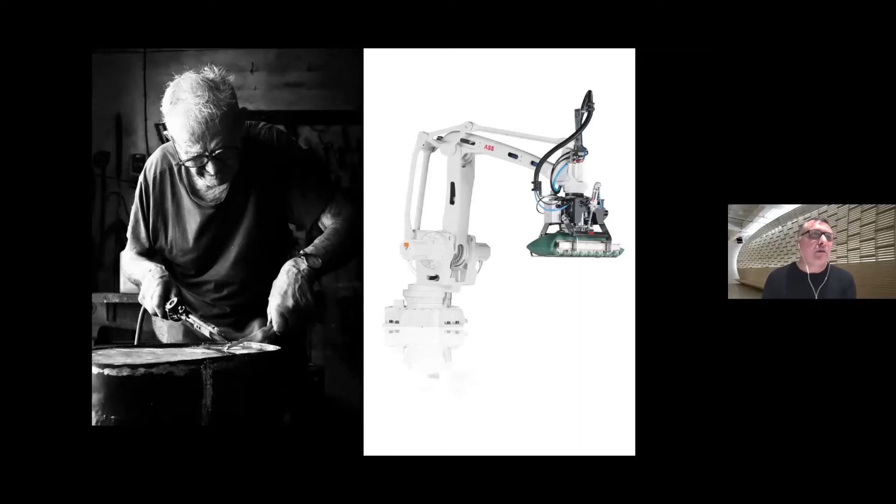So while practical, craftsmanship is not simply a means to an end. Craftsmanship is not limited to work with hand tools. One can embody craftsmanship in a variety of fields and through a variety of technologies. And by common measure, it takes about 10,000 hours of practice, patience, and experience to become a master craftsman. No matter what the field or tool, woodcarver, musician, experimental scientist, or computer programmer, there's an amount of time that one must put in before one can start to tackle broader questions and new problems without the limitations of skill getting in the way.

Sennett talks at length about open source computer programming, and in particular the Linux computer language, as a subfield in which programmers work for the desire to make an elegant code in and of itself. In this context, quality is dependent on an effective community of software engineers and coders working together with the shared goal of bettering the software. The combination of craft and community is very critical, and it's something I'm going to return to at the end of the talk.

So in all eras, craftsmanship implies a particular relationship between the craftsperson and the tool, selecting the right tool for the job. This is more often an ad hoc, pragmatic exercise than an attempt at procedural purity, as craftsmanship focuses on the thing in itself, according to Sennett, not on the tool or the procedure. The thing made is its own justification. Richard Sennett defines craftsmanship as the basic human impulse to do a job well for its own sake. And thus we usually associate good craft with custom products and a high degree of refinement. But what may be understood as good quality varies with the context of the project.

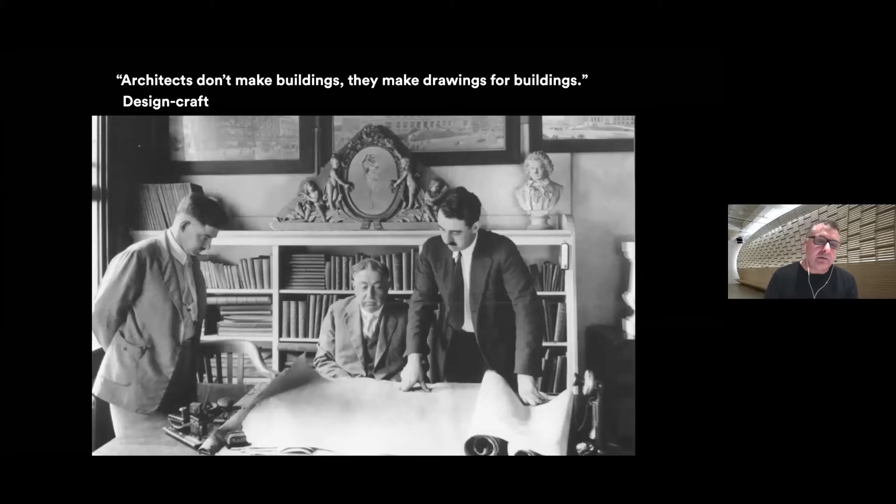Like technocraft in the field of manufacturing quality control, there is an attempt to merge the customization of traditional craft with the efficiency of mass production. However, a lack of coherence between design craft and building craft can still lead to unsatisfactory results. Here in an image from Artforum magazine, a critique of Zaha Hadid's Opera House in Guangzhou in China, which is designed computationally, a very sort of supple, formal building, but on close inspection of the details, you find that they're extremely crude and poorly resolved, where intersections are missing by feet at a time.

And Richard Sennett refers to this as a conflict existing between getting something right and getting something done. And sometimes the desire to force perfection often misses the point of the actual resolution that will happen in the field. So here we see advanced digital design techniques, but a lack of understanding of the real world context of building in China at this particular time, the speed of construction, the methods, the skills of the builders, and the commitment of clients to follow through on very tricky, custom fabricated equipment and details.

So often sophistication at one end of the process, at the design process in the office, must accommodate a lack of sophistication at the other end of the process on the site. And this may require a hybrid technique. Now, Rem Koolhaas recognized the limitations of this idea in OMA's early work and knowingly took advantage of these, or at least post-rationalized it this way, to argue that because there was no money, there were no details, and it's just architectural concept. So he did not care that things were not resolved right. That was potentially a self-serving argument, but nevertheless, it's an attempt to try to deal with that disconnect.

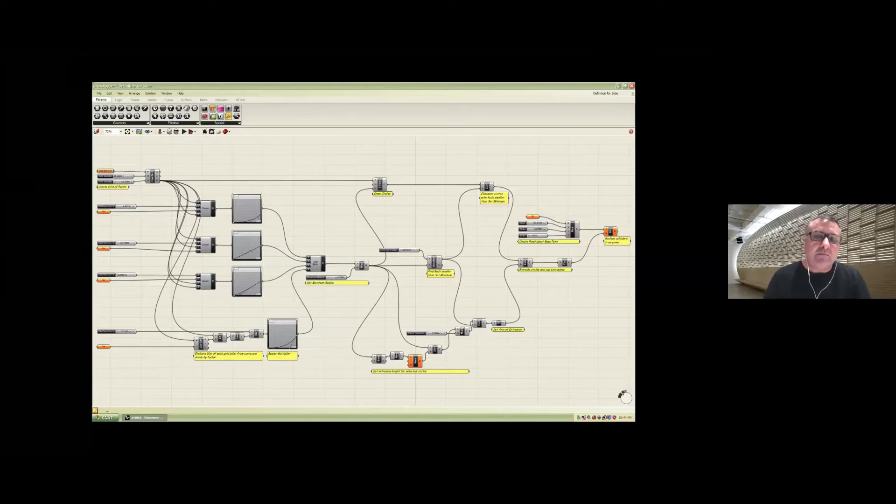And the original version of the model had this infinite variety of holes from a defined maximum and a defined minimum. But we later found out that when we're not working on a machine in the basement of our college, we're working with a fabricator who charges $120 an hour, machine time starts to become a real factor. So routing all of those holes would take a significant amount of time.

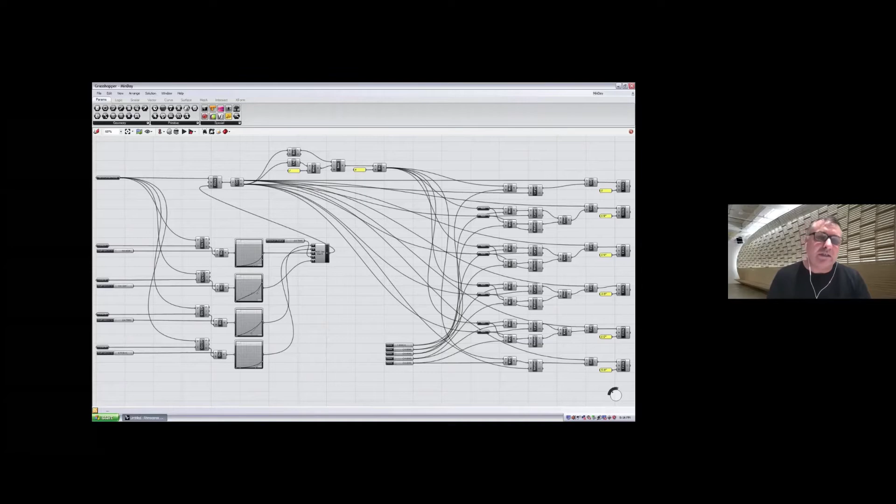And instead, we decided to optimize the project for 5 discrete hole sizes. So there's only 5 different diameters as opposed to an infinite variety. And that allowed them to work with pre-existing drill bits as opposed to routing ends, to drill the holes in one shot each, which cut about 80% of the machine time, and obviously quite a lot of money.

So as a design process, you can start to see the colors indicating the different hole patterns. It's just a variation on the same original script. But in the end, I think the casual visitor would probably understand this as fairly close to what we originally intended. But in order to get to this, one really has to understand the pragmatics of making as opposed to the ideals of a potentially complex project.

For the same project, we designed a furniture piece called the Soft Stones, which was the origin of a furniture line that Min Day started and still kind of exists, called Mod. For this project, we created a coffee table that split from a singular rectangular block into 6 separate and completely unique shapes.

So as you can see, the shapes all have discrete clarity to their form, but each one is very unique and fits only to its adjacent neighbor. And here we have a combination of machine cut surface, cut on a CNC router, and hand finished ends. So although we manufacture this piece and it's been sold several times, the top is always the same, the bottom always varies in a subtle way.

At the Bucktown House in Chicago, we've also designed numerous furniture pieces, but here we took the notion of custom-made furniture and expanded that to become architectural elements in a project that really is based entirely around an elaborate millwork system. In this case, a bar emerges at the push of a button. We used a television lift and just inverted it, and it lowers the bar. I suppose you could lock that so the kids can't get in there, but it impresses the neighbors.

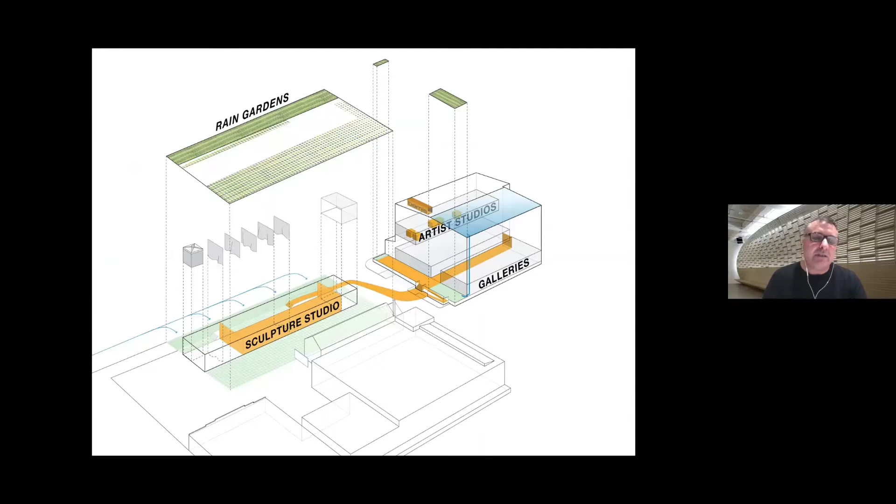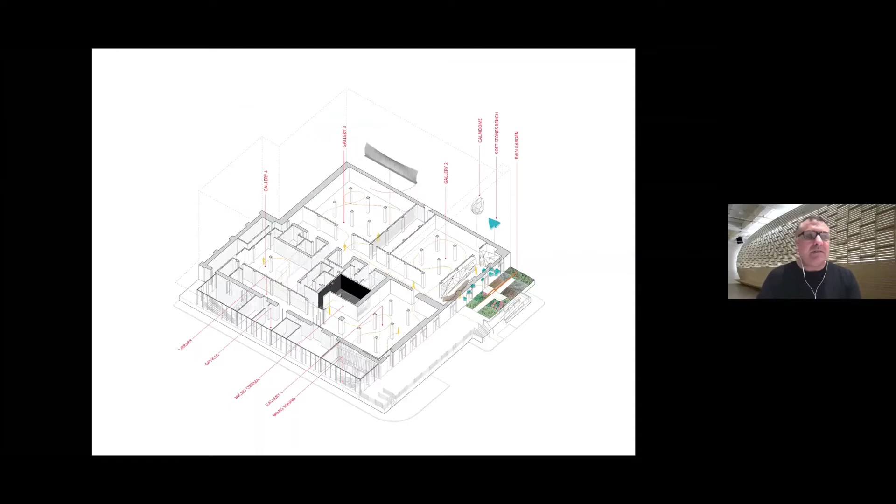So FACT actually began with a master plan for the Bemis Center that's evolved over time and over the years. And later we've added numerous projects and expanded the master plan and actually implemented several of these through different design build studios. So the garden on the exterior, the rainwater catchment idea that didn't get materialized, but the garden is there. On the 3rd floor, we added a whole level of studios plus workspace and installation space for the artists. On the main floor, we reconceived the gallery spaces, reorganized those, and created a cinema and a new reception area that I'll get to in a moment.

And then currently we're working on a venue and facilities for a new sound art and experimental music program that the Bemis runs to bring artists working in sound and music, giving them a place to work. So we have a recording studio and sort of support areas, and then a performance venue where they can perform their works.

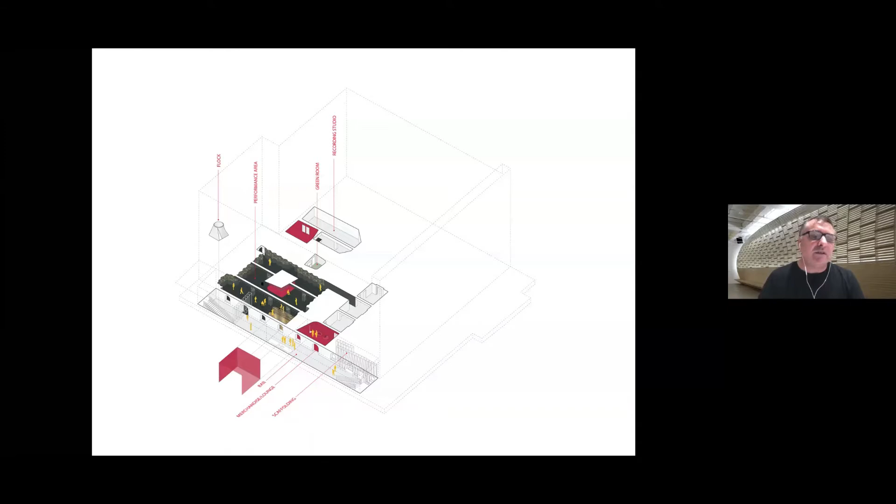But the first project that was actually built is called the Bemis Soft Cube. This was in the summer of 2008. We were asked to create a sort of transformation of a gallery space in this old warehouse building to allow lectures and other kinds of live events to be performed in what is generally thought of as the White Cube Art Gallery. Since the day we were asked to do this, we had 6 weeks to complete the whole project and about a $1,500 budget. Obviously, that's not a lot of money when you start talking about construction and custom fabrication.

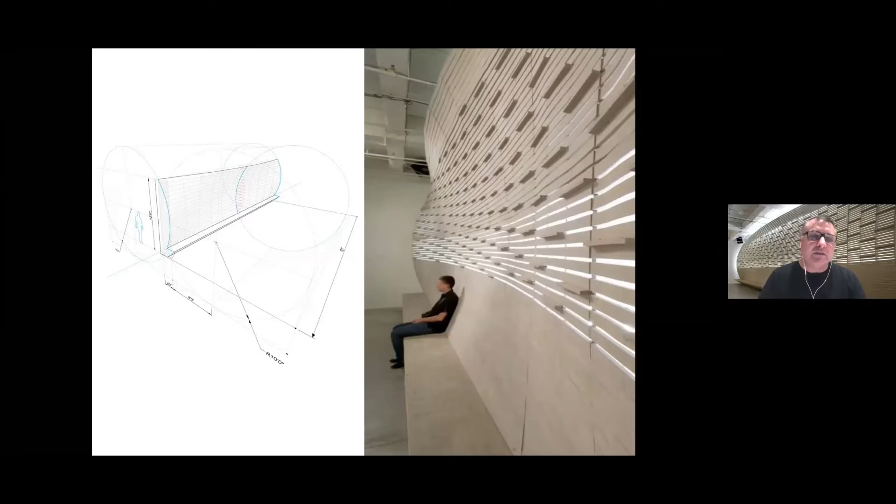But we designed as an acoustical baffle this 40-foot wall, 12 feet tall, as a simple sort of intersection of curved geometries and then a sort of complex hyper surface that wraps over that to create a diffuser for sound, but then resolves itself as a bench at the base for visitors and others to enjoy the show on the other side of the room. The entire piece is built out of cheap CDX plywood, CNC cut and notched to join, and then wrapped with Homasote strips. Construction here, as you can see, bolting these sections together on top of this base, and then in the end, the final piece.

This was intended to be installed and used for the duration of this exhibition for 3 months and then taken away and stored. But they've kept it up since that time, and so it's been in place and used for about 12 years and still going strong. The only issue is that when they told us they wanted to keep the piece installed, we had to tell them that we incorporated no way to change the light bulbs in the back because we assumed that these fluorescent tubes would survive the 3-month run of the show. So we had to modify the piece somewhat so that there was access in the back, but other than that, it's maintained its position in the gallery.

And as you can see in use, it's used for a variety of different kinds of performance events and lectures as well. And it's part of a goal that we've had working with the Bemis to transform the gallery into a place of social engagement, not simply a place of display and consumption of visual materials. But we really think of the Arts Center as a social condenser that brings the community and the artists together.

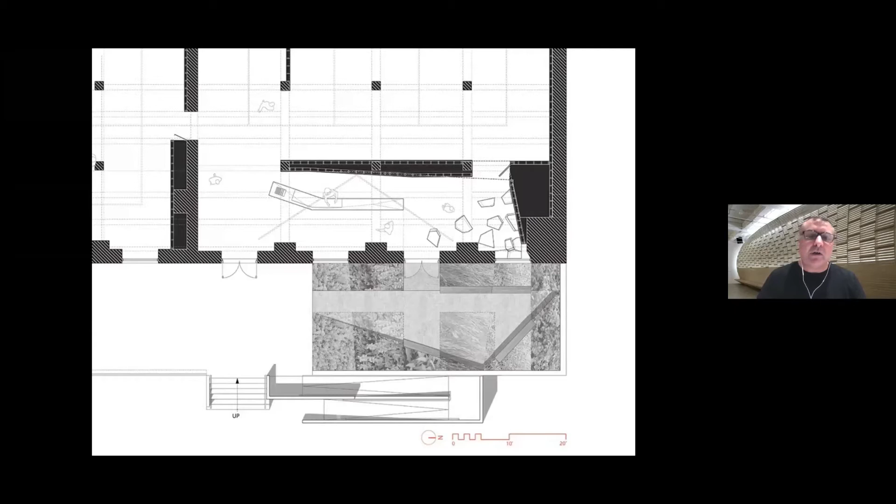But by taking the first bay of the gallery away and creating a space that doesn't have art displayed, we created a social environment, practically used as a reception desk, but that could be converted in the evening for a bar to serve drinks and so on during an opening event.

So this is a project that actually began in the office. We did schematic design in the office and then brought the schematic design to the students so that the students, in fact, would jump immediately into design development and focus on details and not be concerned with initial conceptualization.

The argument I have in the FACT studio and coursework that supports FACT is that most architectural education exists in a world where we are conceiving projects and taking them through maybe schematic design or some level of resolution of that nature. And the idea with FACT is to go and explore the creative opportunities from design development through construction, where, as any architect knows, there's still a lot of things to be thought about.

So the project, as you can see, is an abstraction of a white gallery space, but distorted and then occupied with furniture, which is a soft stone. It's called the soft stones. It's a version of the Stones table, turned into a sort of puzzle-like seating, and then this 24-foot long reception desk. The geometries that we used are based on a pinwheel aperiodic tiling pattern.

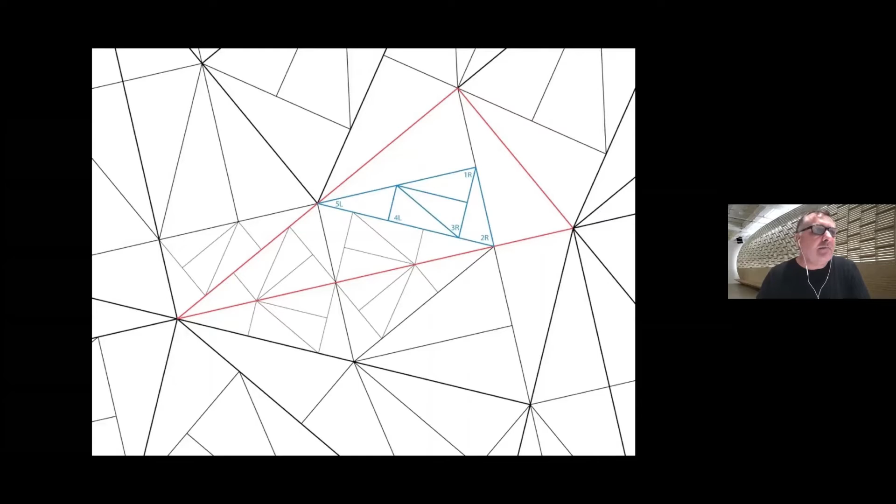This is a fractal pattern that through very simple rules, using scalar versions of the same shape, produces exceptional complexity. As you can see, each triangle can be subdivided into 5 more, and scaling up and down through that allows us to create a very complex set of patterns.

So we took this pattern abstractly, it's scaleless, and then selected an area of that to scale to the Bemis Center space. So you can see the dotted lines there representing the 2 wall surfaces. The red lines then became points of inflection from a very large triangle that doesn't even fit the space. And the smaller pieces are scaled to 8 feet, half of a sheet of MDF, so that we had a very efficient use of material.

And then from there, imposed patterns upon the surface. Now, obviously, this pattern could be implemented at any level of scale. So we had to make decisions about where it shows its density and where it starts to soften and loosen. And so using an algorithm based on these primary inflection points where the major triangles or vertices are coming together, we were able to control the diffusion of the pattern and its scalar nature across the surface.

So this is a photograph of the finished piece, and you can see the large joints are actually joints between panels. The second scale joints are inscribed in the surface, and then the pocketing brings 2 levels of panel triangle inside the others. So the other issue here is trying to turn this 2-dimensional pattern into 3 dimensions, where some distortion is necessary. And as you can see here, the pattern's both bent as we create the corner in the room and inflected along those red lines.

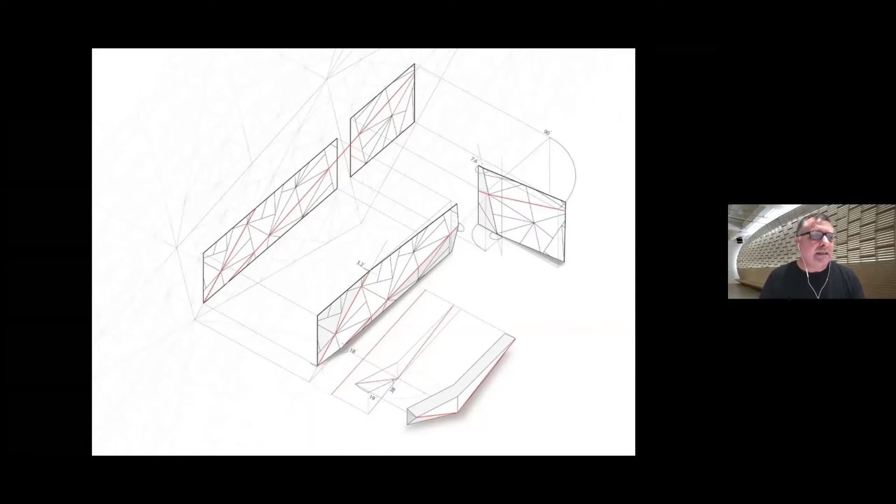And then the desk is actually an extrapolation of that pattern into a fully 3-dimensional sculptural object that sits in the space. As you can see here, the vertex of the wall, you can see how that traces across the surface of the desk.

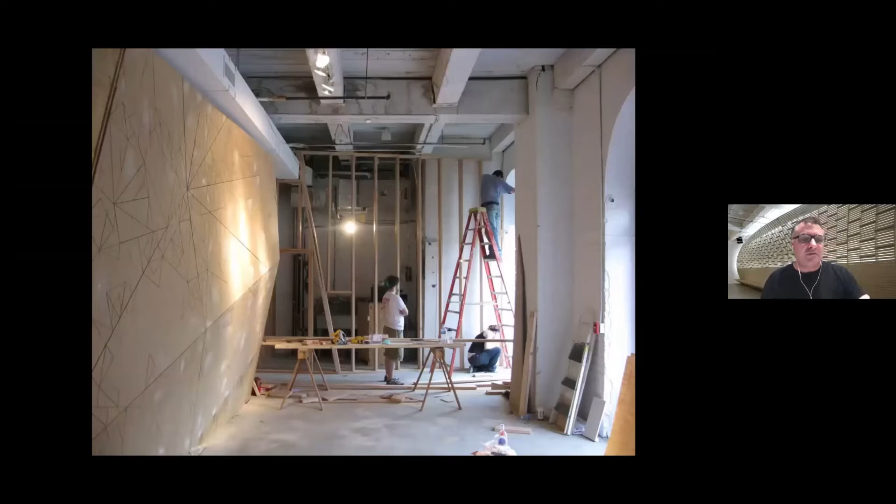The inherent perfection of this piece obviously could be taken to extreme lengths. I think the students did an incredible job of fabricating this and installing it, allowing its abstraction to read through. But they had to do this in a building where between each bay of the 16-foot column grid, the floor might vary 2 inches. So we're dealing here with a very complex sort of intersection of fabrication at a tolerance of 1/1000th of an inch and a building that has extremely low tolerance. And so bringing those together created some interesting challenges.

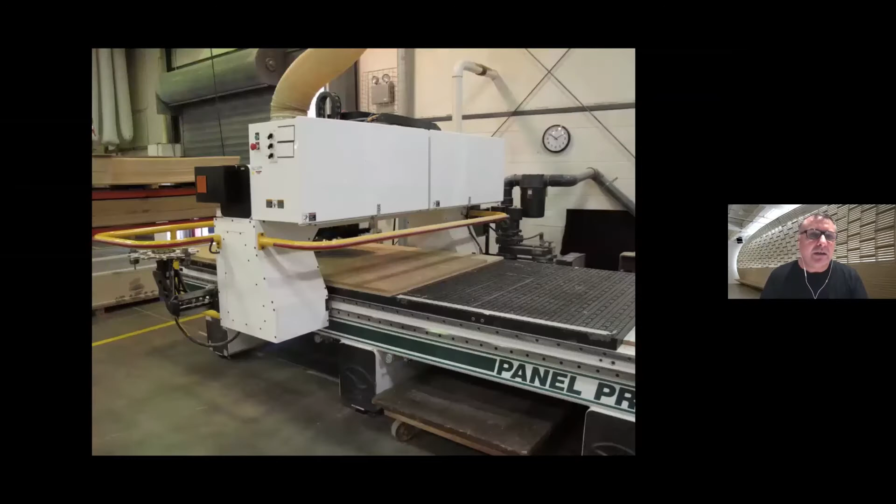Another challenge for this group was, of course, that we had to mill 35 sheets of MDF. And one of my priorities with design build is to really optimize the educational experience and not just turn it into an opportunity for exploiting free labor. And I couldn't imagine students standing by a CNC router for the whole semester while each of these sheets gets cut and pocketed. So we did mock-ups and tests on our own, and then started to search for a partner who could build it. And we found this machine in Lincoln.

So here, this collision of high tolerance digital fabrication with a very rough historic building, and what some people call the site joint, the point where the building meets the site is never as controlled as the building itself, becomes an opportunity for thinking about how these kind of tolerances start to collide and create opportunities. So the way the wall meets the window, it's not perfect, but it starts to show the intersection of these different levels of understanding of tolerance. Fortunately, nowadays, they've gotten rid of the video monitors and they're no longer mounted on the face of the wall, which is not something we were too excited about.

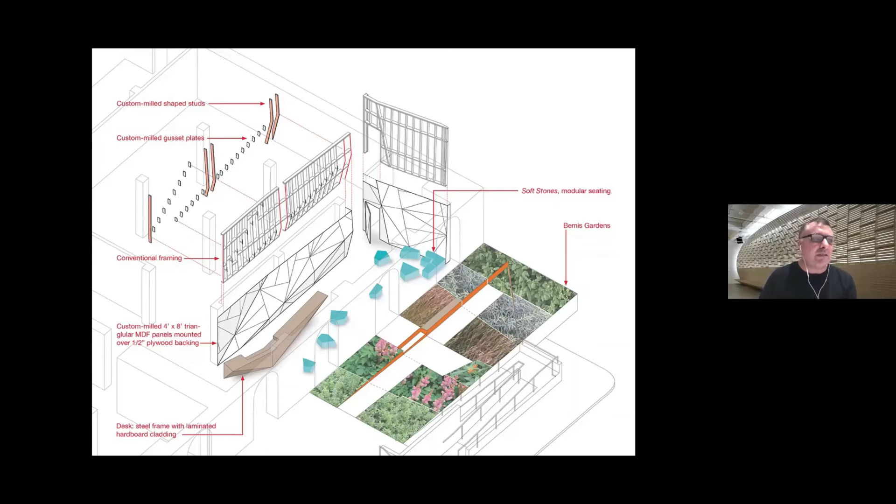The garden, I'm not going to show today, but the garden is sort of a further extrapolation of some of those geometries out onto what used to be a loading dock and was planted with native plants of various kinds, working with the landscape architecture department and students from that program. The current project, though, the experimental music and sound art program, the first phase of this was completed at the beginning of this year. It's called Bemis Low End, and it's a performance space. We had maybe 3 performances in there before COVID, and everything is shut down. The Bemis still runs virtual performances, sometimes in the space, sometimes wherever the artists happen to be located. And obviously, we're waiting for the pandemic to resolve before we can open the space again.

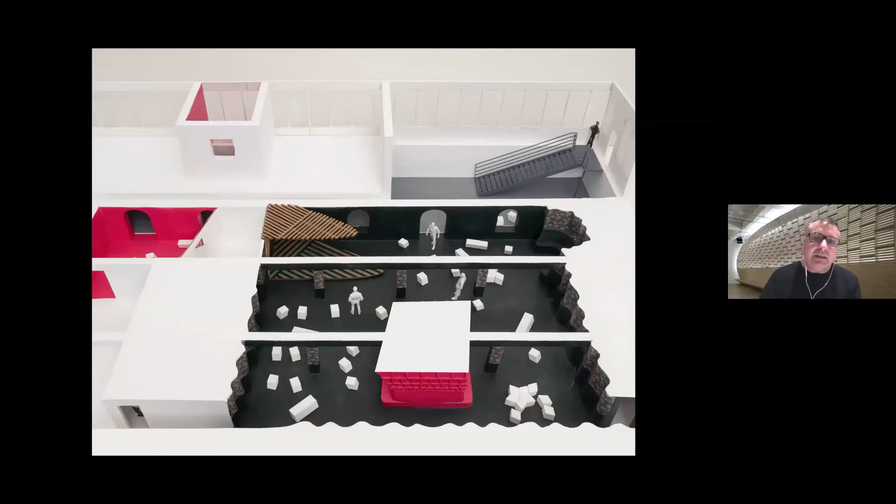One of the things that I think is of interest in this project is a reference to what the craft theorist David Pye refers to as the workmanship of risk versus the workmanship of certainty. So the workmanship of certainty is familiar to architects. It's usually what we deal with in the architectural world. We draw something on a computer, model it, it gets built exactly as drawn, and there's very little change between conception and completion. The workmanship of risk, on the other hand, introduces uncertainty into the process. This would be like a wood carver or some traditional fabrication technique where the difference between one iteration and the next might be fairly noticeable, whereas in the workmanship of certainty, exemplified by mass production, one rarely sees difference between one shoe and the next shoe.

So in this project, we wanted to think about both of those ways of conceiving of craft and addressing that in the same project. So fabrication often begins with large-scale models. These half-inch scale models are actually ways of designing at a scale where one can get into a high level of detail and start to build things the way they're really to be built. And then we start doing one-to-one mock-ups and move on to fabrication. In this case, we split the project into numerous phases in order to accommodate the complexity and scale of the project, and also to work with budget years, so that some work was done in 2019 and other work was done in 2020.

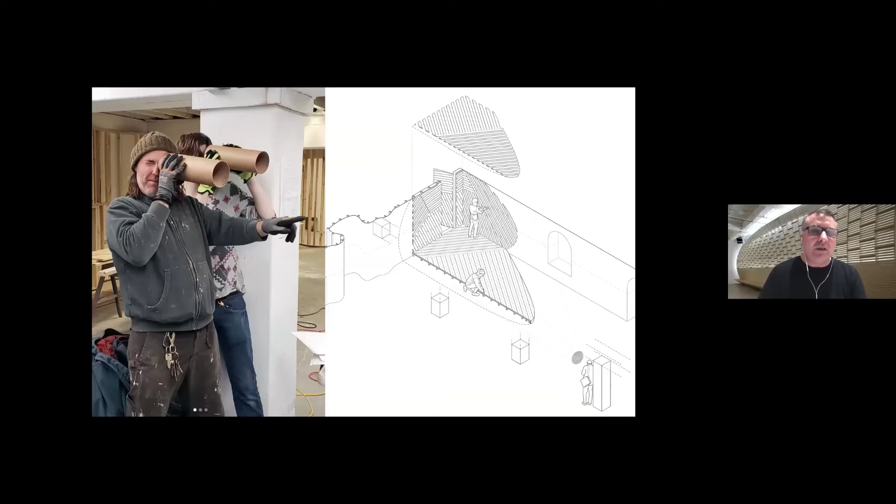So here we have, again, in David Pye's terms, the workmanship of certainty played out in a high degree of control. But then this other element in the space we call the monolith exemplifies the idea of workmanship of risk, but in fact began its life as a parametric model as well. So this object called the monolith is really a wrapping of a mechanical room right in the very middle of the performance space that couldn't be moved for budget reasons. It's actually serving the upper floors of the building.

So we had to keep this, we had to deal with it, we had to address acoustic issues from the mechanical equipment itself, but also the acoustic effect that this object would have within the space. So baffling it on the exterior, creating layers of acoustic insulation was really critical, and then allowing it to absorb sound. So the bottom is an upholstered seating element, which is very popular for patrons, and then the top began as a way to break up various frequencies. The larger holes deal with bigger frequencies.

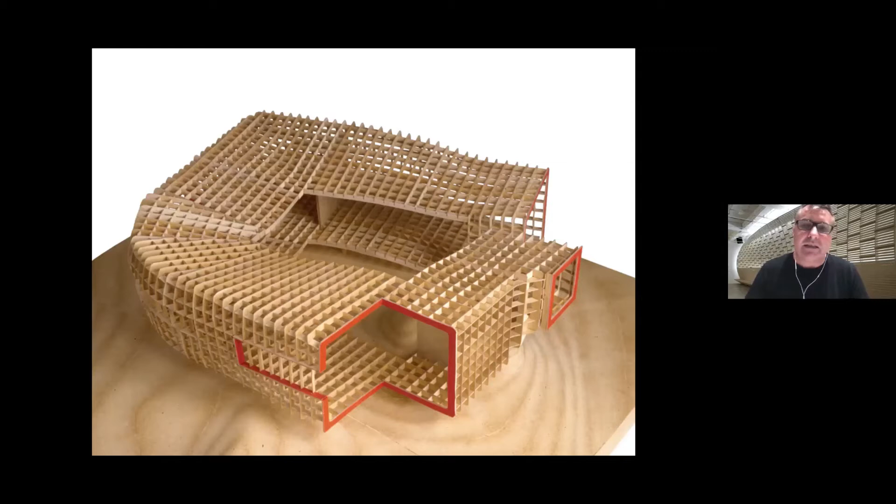But in resolution here, this project is really, again, an exhibition of this notion of the conflict existing between getting something right and getting it done. But in this point, trying to actually embrace the chunkiness of the project and the looseness, and allowing that imprecision between the computational model and the fabrication of the project to be an improvement upon, or seen as an improvement upon, the original.

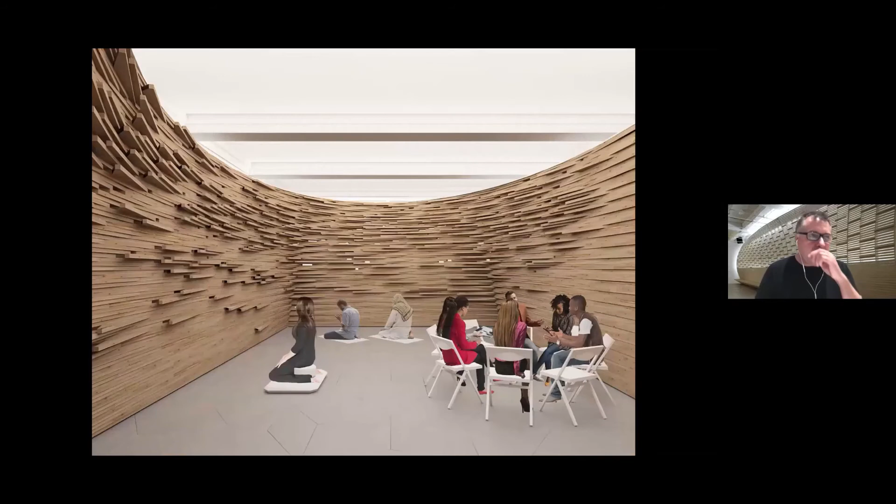So Flock actually began itself as a commission for a multi-faith chapel in a historic building at Santa Clara University in California, in an old mission building. It's a historically listed building. We were not allowed to touch any of the structure of the building, not change any surfaces. So this had to be a freestanding interior space built within the walls of the existing space.

We conceived it as a multi-faith chapel. It's a Catholic university, but we conceived this as a space, as it was intended for students of all faiths or interests to use as a meeting area. So there's some subtle hints in the space. The rotation of the ellipse above the rectangle is a way to signal the direction to Mecca. So Muslim students would know where they're praying. They know the direction of prayer in the space. For others, it would just be an unexpected space of certain kind of resolution.

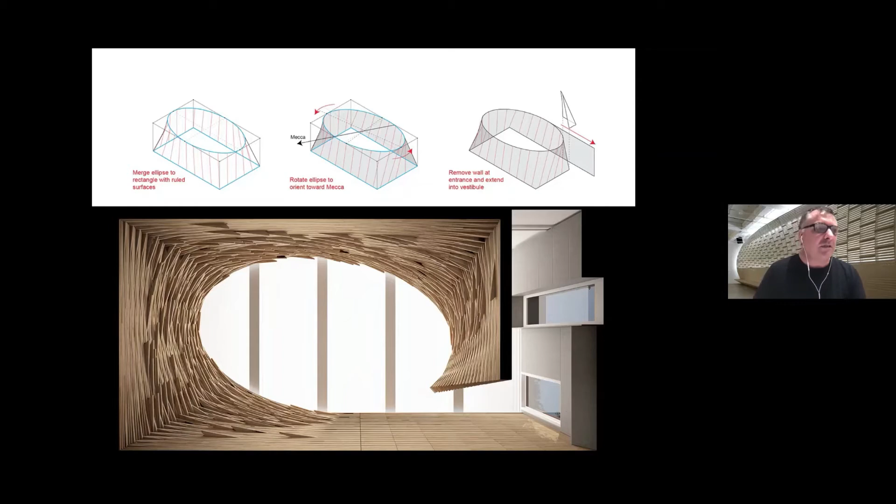But geometrically, that translation of the rectangle to the ellipse created a lot of interesting challenges. Three-dimensionally, it's kind of an interesting surface, but construction-wise, very complex. We conceived this ultimately as a way of exploring a kind of post-tensioned wood construction where we have a steel member at the base that is a ring that wraps around the room, and then a steel ring at the top that is almost complete. The two rings are connected by cables. The wood elements are stacked around those cables, and then the top plate is compressed by tightening the cables to compress the whole piece into a rigid assembly without using any fasteners or any glue of any kind.

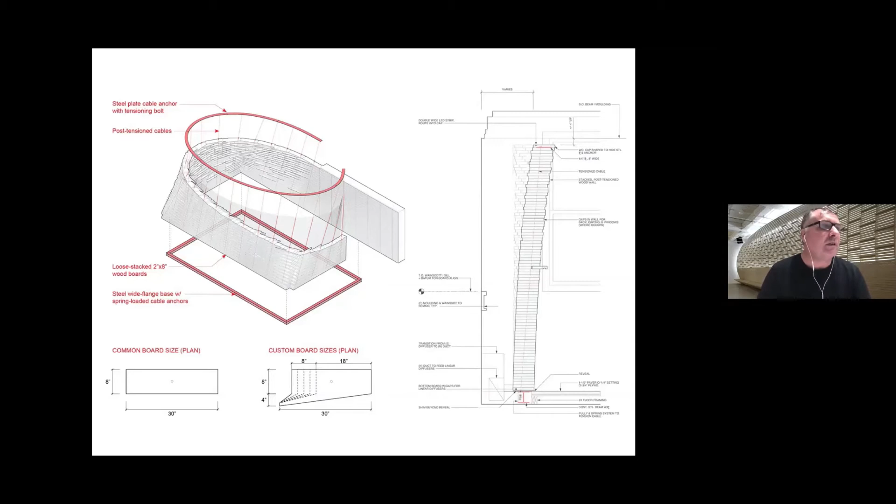This project got canceled for reasons that have nothing to do with our design, but changing priorities at the university for the building. But we were very interested in exploring this, so we got a grant and an invitation to do an installation in a gallery in Omaha that was right across from our office. And so we built a small 10-foot by 10-foot version of the piece, seen here in this oddly shaped gallery. So the dimensions really were based on the available space in the gallery.

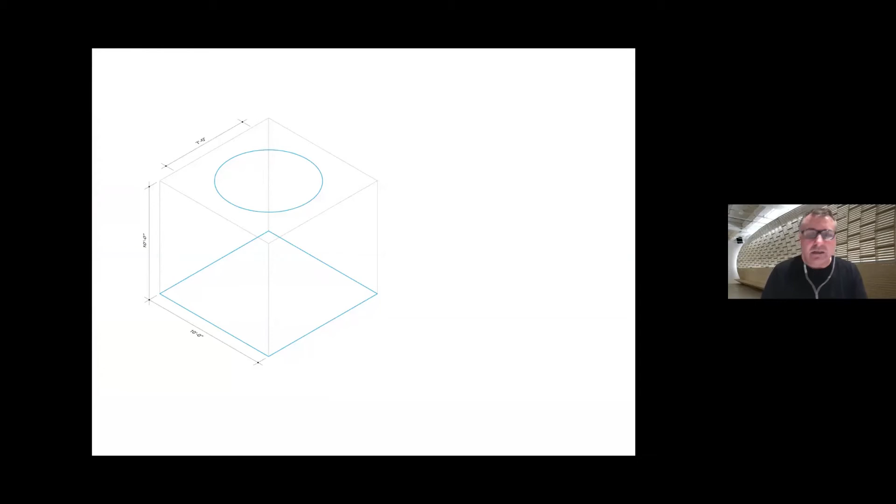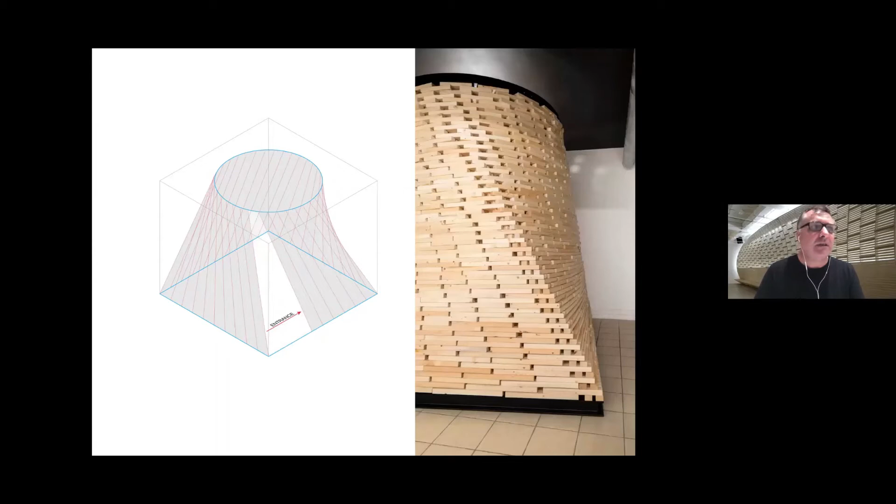We started with this 10-foot cube, 7-foot circle centered above that, stringing 37 airplane cables between those to create the rolled surfaces of this conical shape, rotating it 30 degrees to create an additional kind of visual tension, but also a structural tension that was helpful. And then, as you can see in the end, the twist starts to give this a pretty dynamic effect of the translation of the square to the circle, but doing that entirely with standard construction material. The opening is just a gap between pieces, and there you see the ultimate piece.

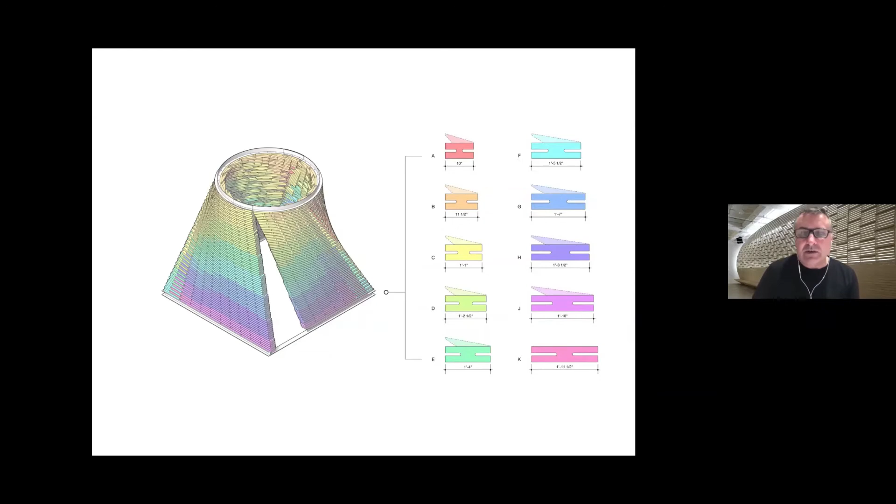So ultimately, we designed this in a Grasshopper script to try to determine the various lengths of the pieces. And so here, to achieve high resolution, there would need to be very many unique pieces to allow a gradual transition of form. The fewer pieces, the lower the resolution, but the easier the assembly and the fabrication. And we settled on this notion of 10 different dimensions, and then a modifier, a thing we call a twig, which is an extension off the piece that has no structural function, but is visibly manifest within the interior. So that's the Grasshopper script.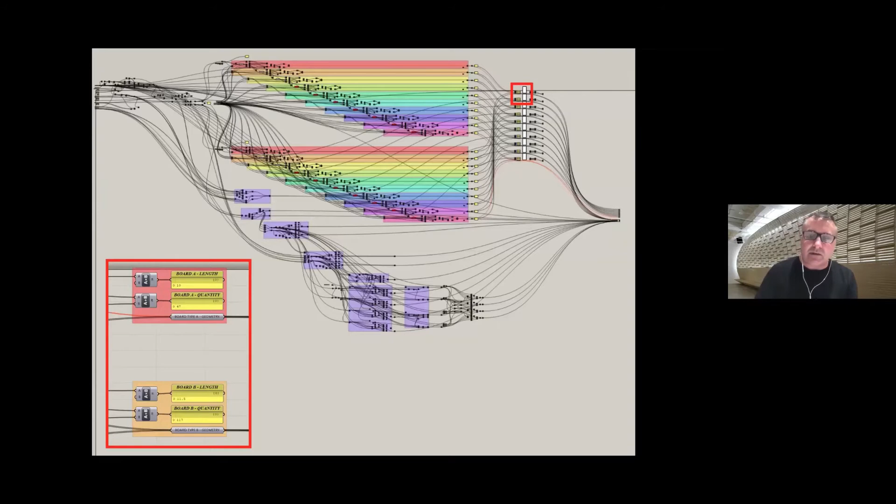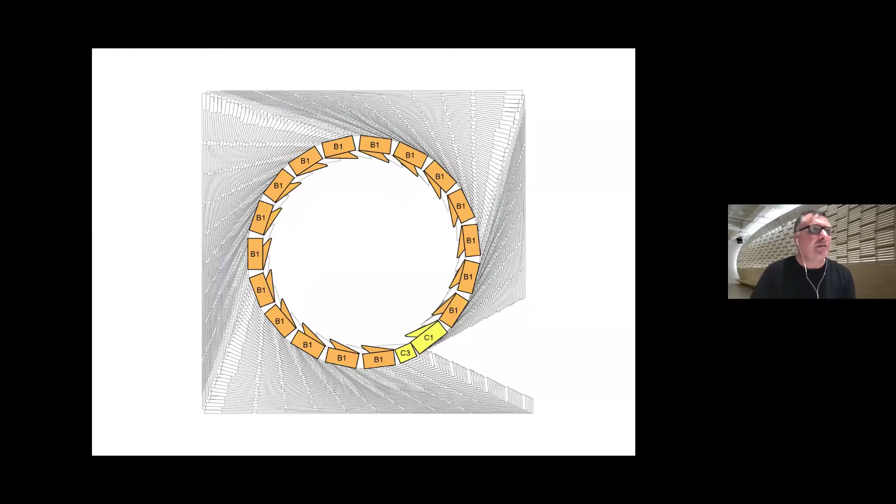The adjustment of board length and quantity here gave us this apparent optimization. The construction has 72 layers. There's about 2,500 pieces of 2x6 lumber. Each color represents a different length. And I'm skipping through here, but as you can see, as the pieces get smaller and start to come together, they form a near circle.

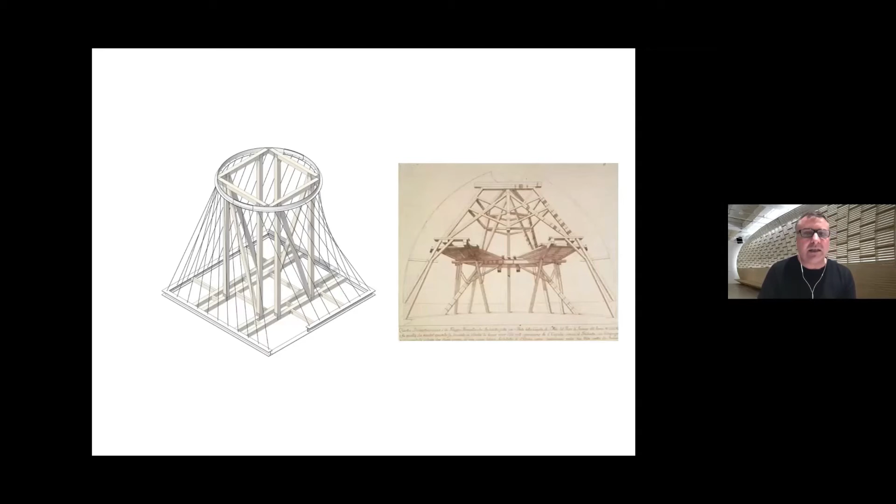So in order to build this, because the cables obviously don't function in tension without the compression of the wood members, but the piece can't be assembled without the cables in place, we came up with a kind of medieval falsework, or Renaissance falsework, I guess, a method used for centering of arches and domes, and created this scaffold on the interior that would hold up the steel ring at the top, allow us to stretch the cables, and then to stack the wood elements until they reach the top.

Then the scaffold can be removed. It's bolted to the top ring. It can be unbolted and taken apart, and then that's the end of the piece. So this short video, I'm going to skip through it a little bit. We'll show how this goes together. So this is the installation of the scaffold with the steel ring. And then the cables start to come in.

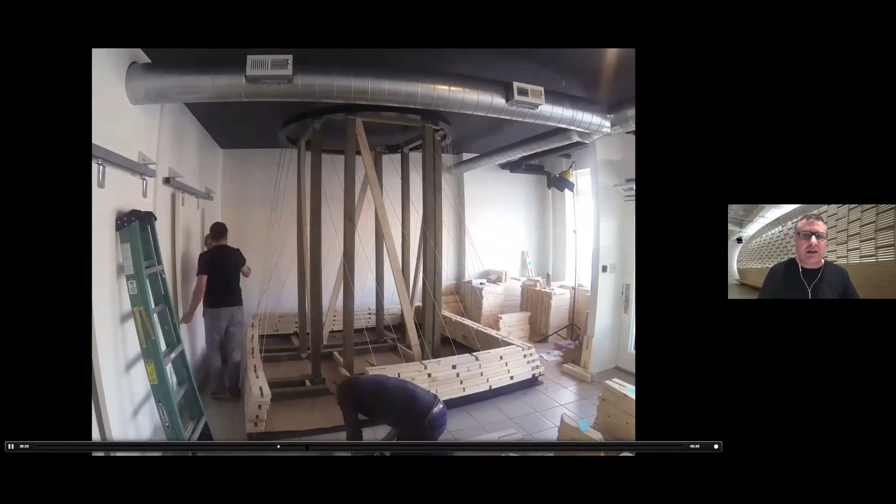Wood members going on. So each wood piece has a slot at either end, so it can be slipped in between the cables. The cables get closer as they reach the top, and the wood boards get smaller so that they still fit. The important thing here is following the map and getting the right piece in the right place. And then as it reaches the top, it starts to come together and the scaffold is taken out, and there we have the final piece.

So in the interior, these twigs start to have a visual impact. We call it flocks. It's like a flock of birds flying through the space. There's more twigs at the top than at the bottom, so it starts to change as it moves towards the top of the piece. And as I mentioned, this was a gallery installation that is now permanently installed at the Bemis low end as a sort of subspace within that.

So at a larger scale, we've been exploring an interest in how cultural projects can become vehicles for positive social change and thinking about community-oriented buildings as ways of building community. I'm going to show 3 projects, the first of which is the Artist Lofts on Lake Street. This is a collaboration with SO-IL and Actual Architecture Co.. The project's currently in fundraising, and hopefully we'll start moving on to the next phase in the near future.

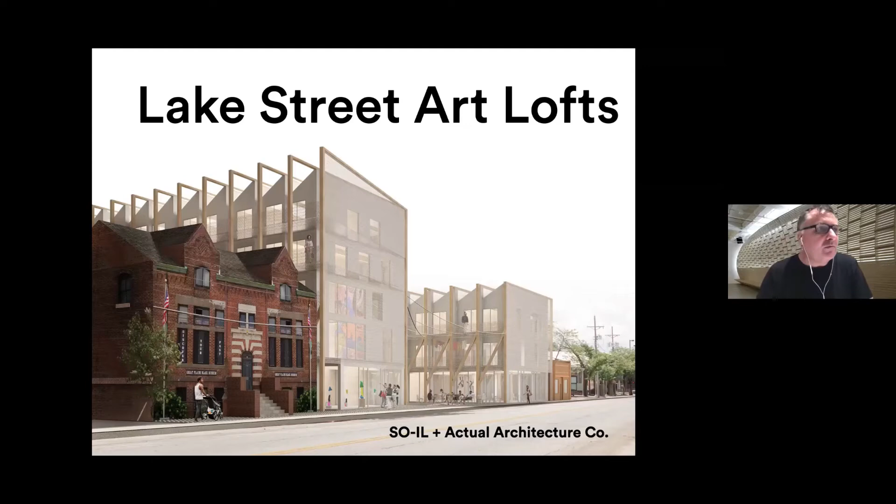Following our interest at the Bemis of creating social spaces that are activated by architecture and events, we're very interested here in the connection between the craft, this is a space for artists, and their connection to their community, and thinking about the intimacy of those relationships. This is in North Omaha, a historically African-American neighborhood. As you can see, there are a lot of vacant lots, evidenced by all the grassy spaces. And this project exists adjacent to a new contemporary arts center and is partially sponsored by the Arts Center and a local nonprofit developer.

We began with a series of public workshops on the site itself, working with a series of stakeholders, artists, and local community members who joined us for charrettes to try to help us understand the relationship of workspace and dwelling space. And then the building itself, or pair of buildings here, becomes a gradient between public open space, private open space, and private interior space, and then also public interior spaces.

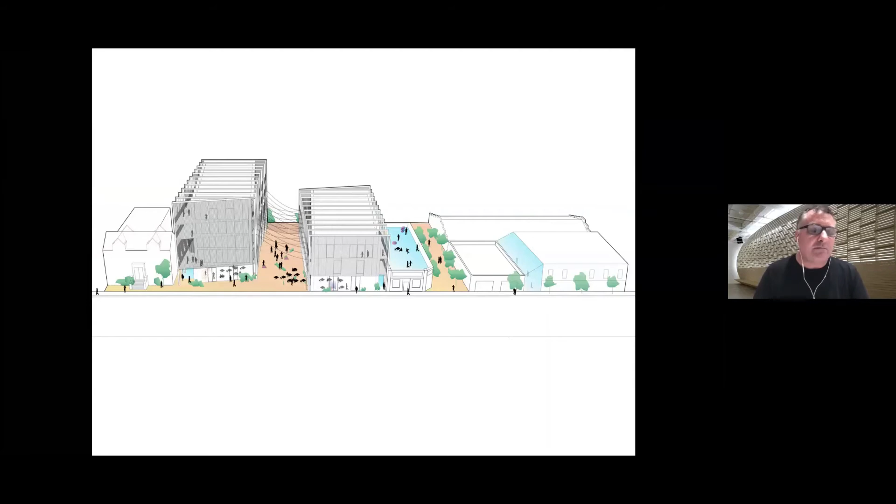The low building to the right of our 2 new buildings is a historic jazz club, very famous, and it'll be restored and integrated into the project. And then on the left, the historic brick building is a former telephone exchange that was at one time the home for the Great Plains Black History Museum. The building is in terrible shape now, and hopefully we can restore that as part of the project and bring the Great Plains Black History Museum back to the project.

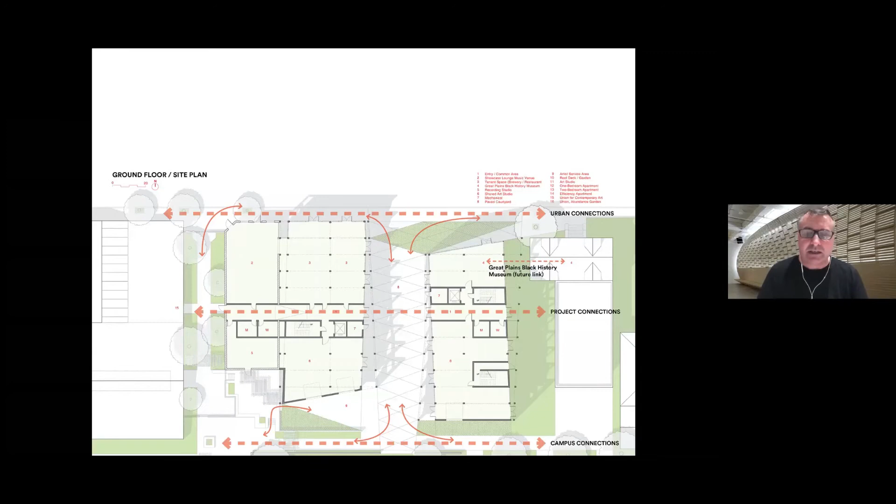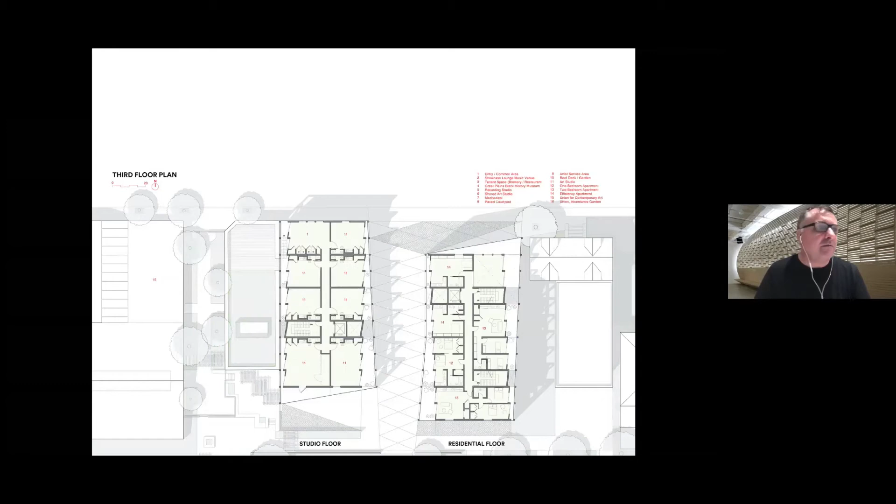So here we worked with a 10-foot grid, optimized for cross-laminated timber construction, so that each panel could span the width and then the length of each bay within the building. At the ground floor, there's a lot of connectivity between the adjacent buildings and the outdoor spaces. And then as one moves up, the floors alternate between studio floors, exemplified here by the building on the left, and apartment floors on the building on the right. The artists in our stakeholder groups really preferred to maintain a separation between work and live spaces. So as you move up, one building is taller than the other.

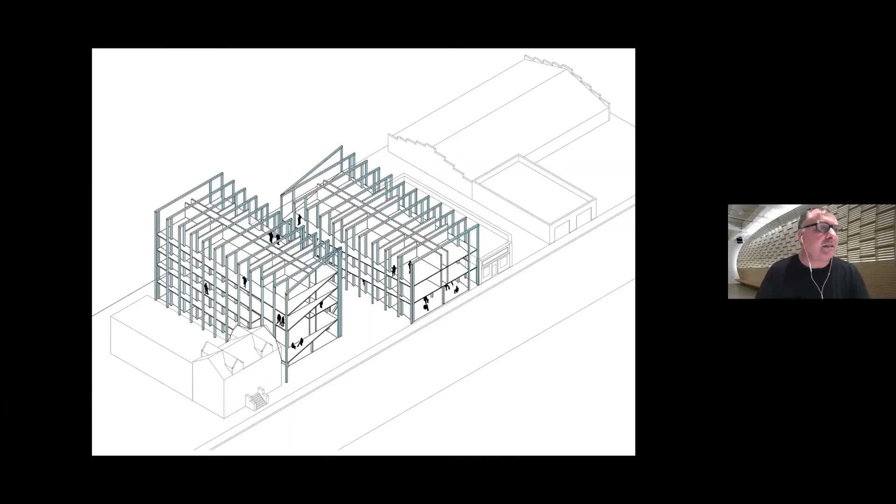The notion here is really thinking about the building as a scaffold to mix activities, alternating these living and dwelling floors. So again, as I mentioned, it's cross-laminated timber construction with an exoskeleton of oak glulam beams that can be out of doors, so they're outside the envelope of the building. Decks or screens of metal mesh start to provide a sense of translucency to this in-between space. So all the artists have outdoor decks. And then this public realm within and upon the buildings.

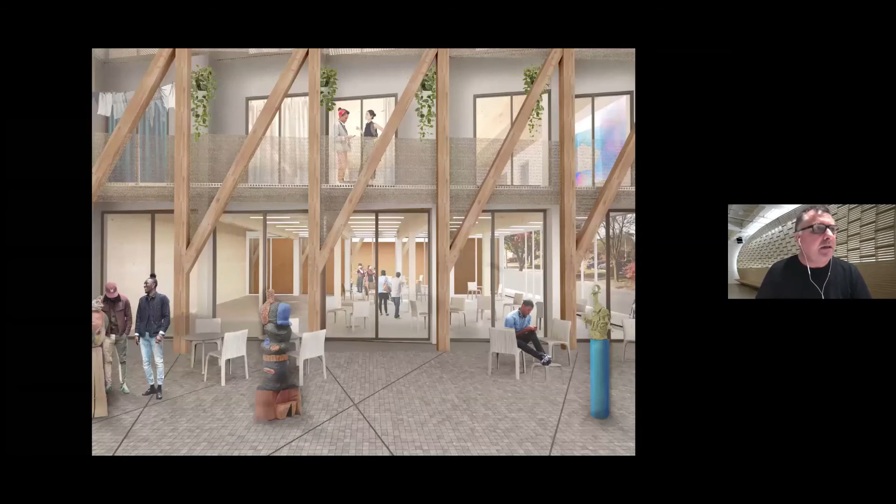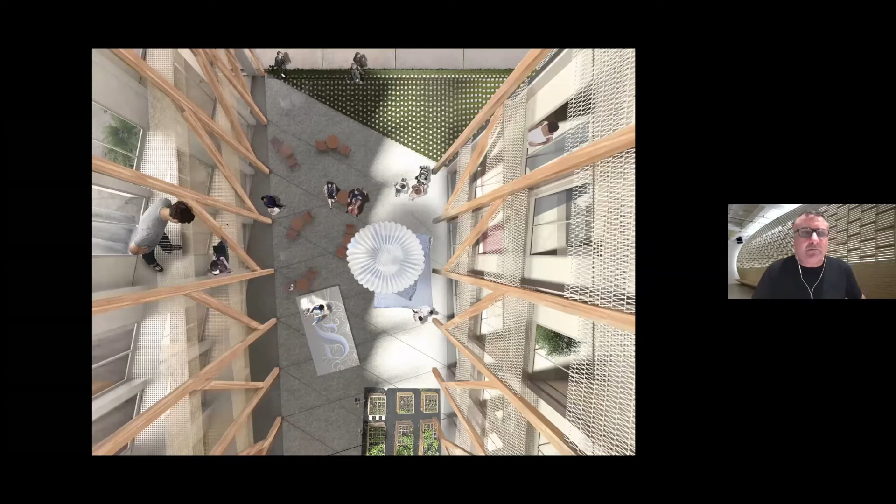So the idea is to create as much translucency and indoor-outdoor connectivity as possible between the various buildings on this cultural campus. So private workspaces and then a public outdoor space between, creating a really productive living and community building for this evolving neighborhood. And as I mentioned, this project is in fundraising, and we're hoping that in the next year or two, we can start to move into design development and then construction.

The next project is an ongoing project that began as a FACT studio project, and now the office, Actual Architecture Company, is completing construction drawings, and it's in construction. They're doing demolition right now. This was thought of as a design build project, but it's on the far side of Nebraska, and very difficult for us to get students out there, especially during this condition where we can't work in person.

But this grocery is the first public venue for the Sandhills Institute, which was started by the artist Mel Ziegler, who's well known as a social practice artist. He teaches at Vanderbilt, so not far from you. And it's like the Bemis. It's a residency, but artists come to this small town of Rushville in the ranching community in northwest Nebraska, and they work directly with the community of ranchers and farmers to create projects. And none of the projects that the artists create are done on their own in the studio. They're always done in conjunction with people in the community as a way of trying to tie the community together.

It's a very unique landscape. It's on the edge of the Nebraska Sandhills, which is an incredible place to visit if you happen to be heading up that way. It's not too far from the Black Hills in South Dakota or Mount Rushmore, so if you were going there, try to stop by here. It's a ranching community where culture takes some interesting forms. Bale racing, fun thing to do. I wouldn't get in the way of that.

And that's what we're trying to do with the architecture, to take what's there, leave certain elements, change others, and to confuse in a way the historic record. I don't think preservationists like that, but we're interested here in trying to manipulate an understanding of what is historic and what is contemporary, and letting that be vague.

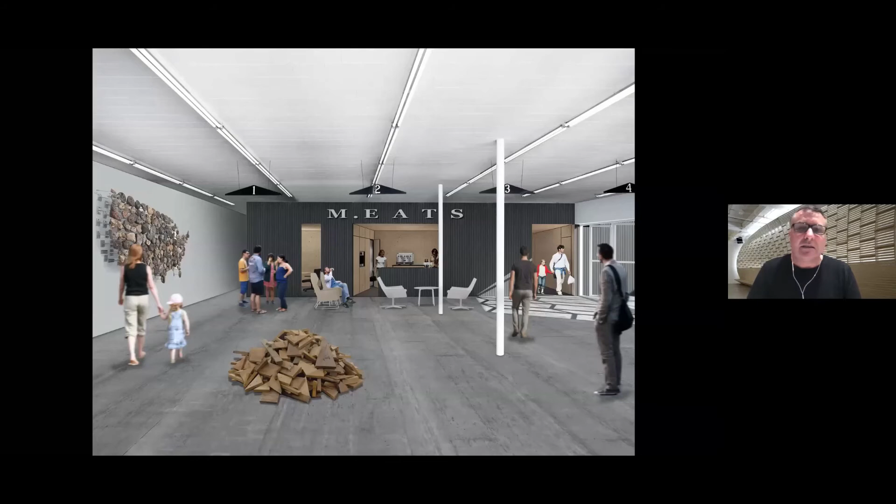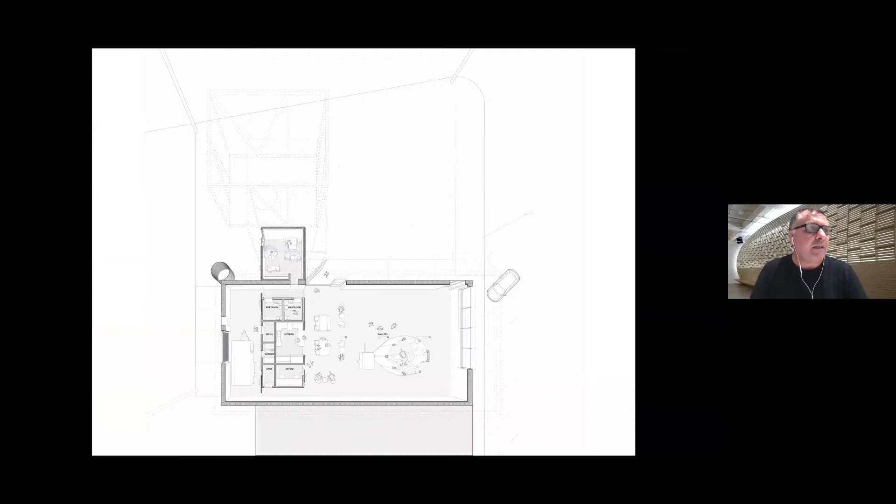So we also have a landscape design for this. These images were created before the landscape was resolved, but it's an indoor-outdoor venue. The main open space could be for public events or lectures. The tower, as I mentioned, each level is a small artist's apartment. And then the interior of that is kitchen, restrooms, small office, and storage, really focusing on the public realm, which could be used as a community center and also a space for exhibitions and events.

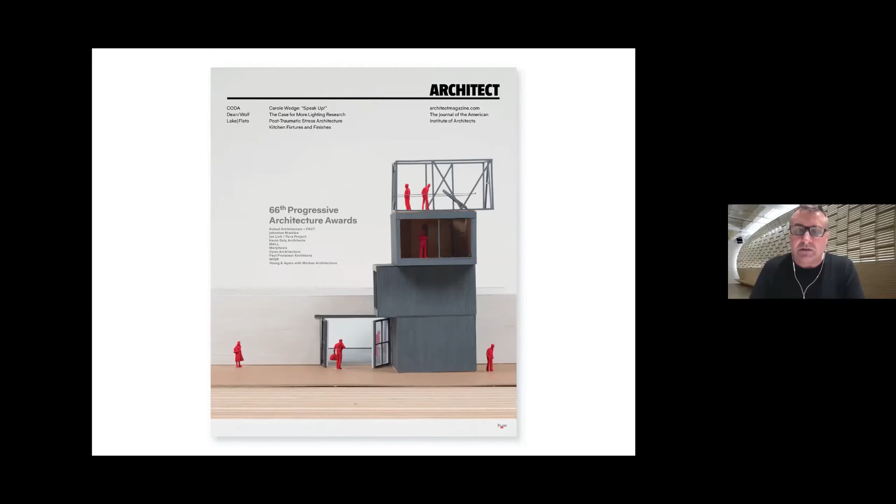This project won a PA award in 2019, which obviously was a great thing for the project, and we got the image of the model on the cover. But what it really helped was fundraising and scheduling. The original idea was to phase this project over a few years based on a slow fundraising schedule. But by winning this award, we were able to finalize the budget very quickly and start to conceive a single year construction process. So that got delayed because of COVID, but we'll be building it next summer.

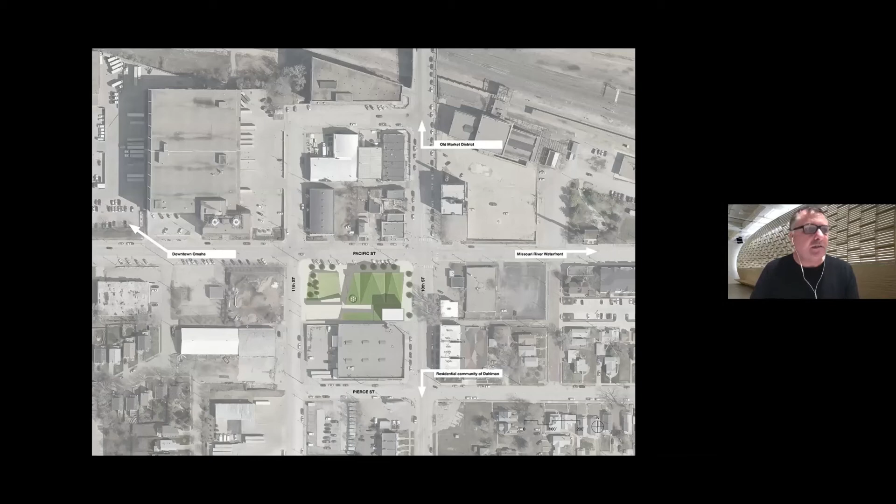The final project I want to show is the Blue Barn Theater, completed at the end of 2015 in Omaha, Nebraska, not far from where our office is right now. And this building is, again, an example of a highly community-based project, and it's in fact 3 different projects. It sits between the old market where my office is, a residential community to the south, the Missouri River to the east, and then downtown Omaha to the northwest.

So there's 3 projects in one here. There's the Blue Barn Theater itself, which is the impetus for this. There is a private development called Boxcar 10, which is a mixed-use building. And then there's a public outdoor space, originally called Green in the City.

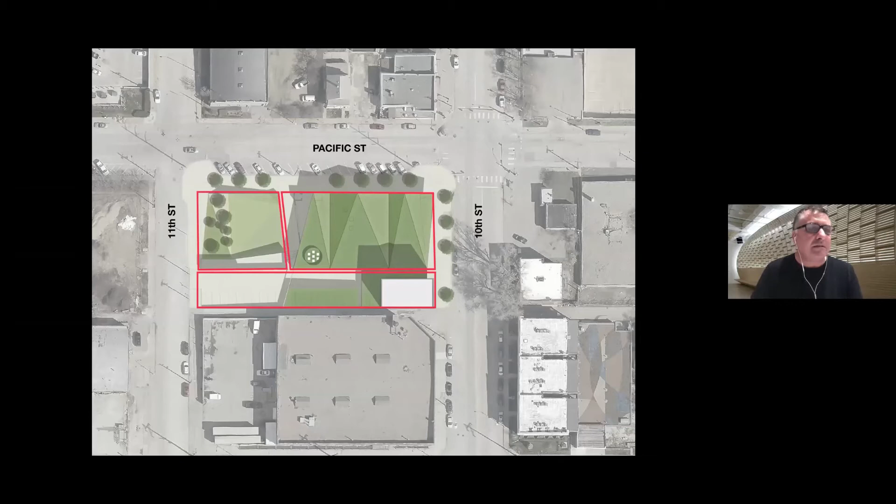The 3 come together to form a sort of cohesive yet differentiated experience of urban space. And for us as architects, it's an example of thinking about, again, this sort of intersection of the abstraction of art spaces and the explicit nature of experience of the city.

So the white cube is an example of this kind of notion, originally published in Artforum in 1976. Brian O'Doherty wrote Inside the White Cube: The Ideology of Gallery Space, and coined this term, the white cube. He succinctly traces the development of the ubiquitous modern form of the neutral white gallery from its roots in easel painting and the frame, the notion of separating the artwork from the world.

And then the equivalent to that in the theater world is the black box, which was conceived in the 50s and really became popular in the 1960s on numerous college campuses. Peter Brook, who conceived the notion, didn't really conceive the idea of the black neutrality, but conceived the idea that a theater work doesn't need a glamorous theater space. It really just needs a text, an actor, and an audience.

And so, whereas he was fascinated with the particular properties of spaces and their unique character, a lot of directors started to think of what he was talking about as the equivalent of neutrality, trying to create a void within which the theater work occurs, completely detached from any sense of an exterior or a city or a context of any kind.

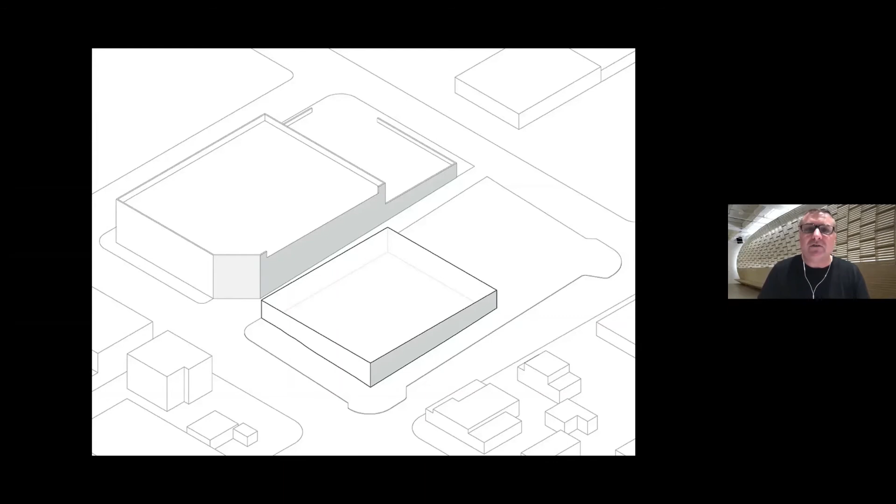And so for us, this project began around trying to understand how one can create a kind of flexibility without neutrality. We like the flexibility of the black box, the ability to stage different configurations of theater productions, but we don't like its neutrality and blankness. So we conceived the project as this void of a theater removed to create this box, which became Boxcar 10, the apartment building next door. These actually have separate owners, but the projects were designed together with the same design team.

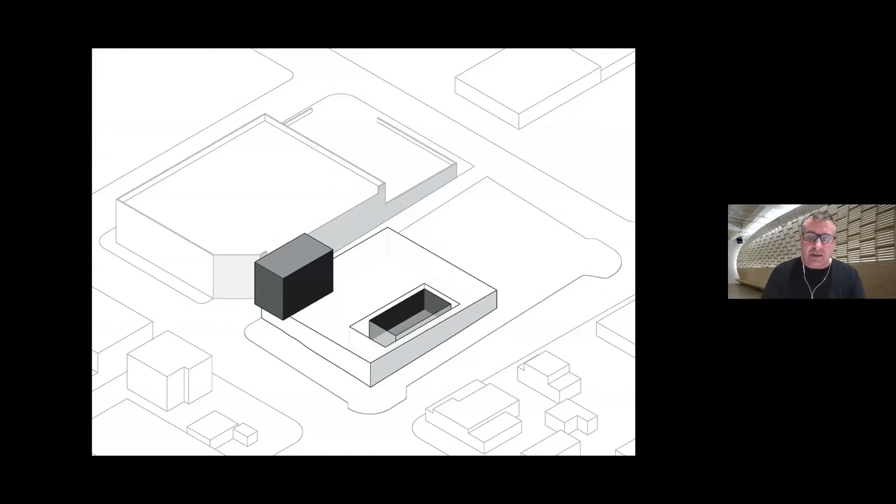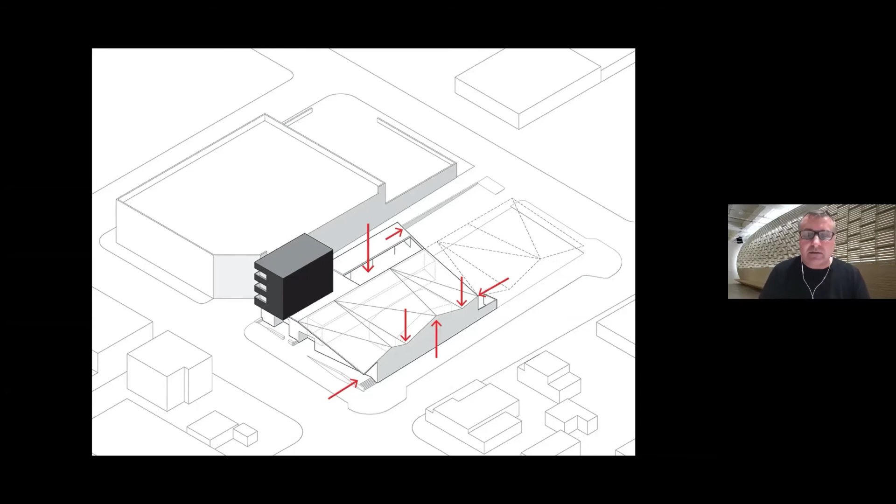And then surrounding that theater performance venue concentrically with a back of house space, a public realm in blue, and then applying a very straightforward conception of a roof form that follows the programmatic requirements of the theater and the necessity for roof drainage, allowing that to inflect the form. And then in working with the designers of the garden, conceiving that roof as something that's pushed down to the ground as topography.

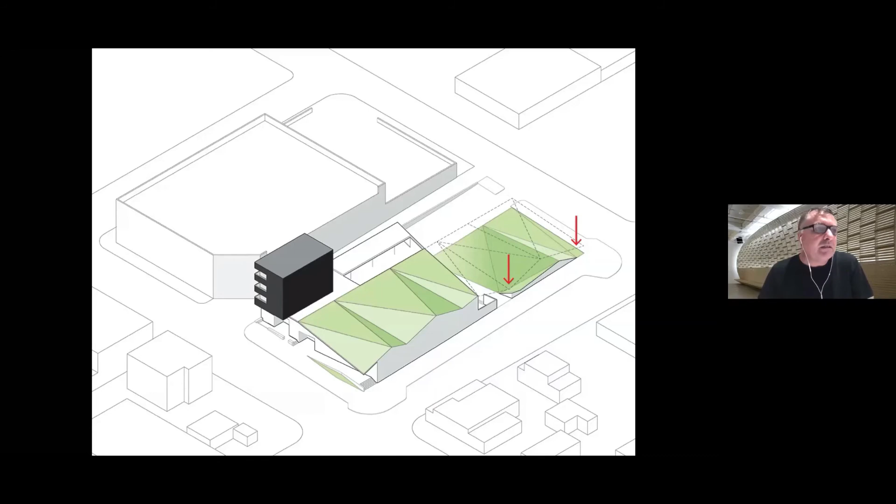So when we were hired to design these 2 buildings and work on this outdoor space, we argued that the space would achieve more diversity as an urban place if other voices were involved in the process. So we argued to hold an international design competition for the garden to create this unique outdoor space for Omaha. We did a 2-stage competition, started with 50 entries, went down to 5 that were paid a stipend, and ultimately the winner was El Dorado, Inc. with Urban Rain Design, a landscape architecture practice.

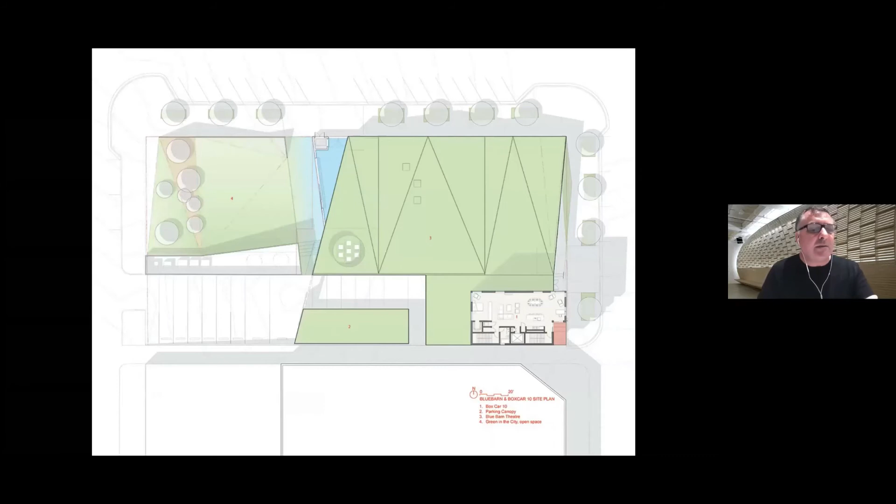The normal blankness of theater buildings starts to express itself on the street with these very large openings. And then we came up with a really unique cladding system to create a sense of overt materiality, challenging the typical American approach to building construction, which privileges products over materials. So products you might purchase out of a catalog or from a vendor instead of materials that are fabricated and custom built.

So in a sense, the architectural process in North America anyway is really a kind of shopping where you shop for specified materials that have assembly rules and warranties and so on. But there's very little customization occurring in that.

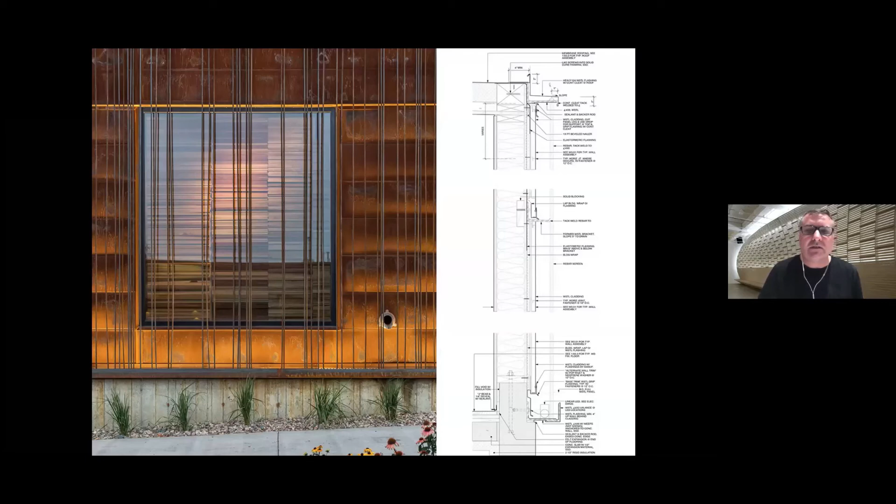And so to counter this, we came up with a building envelope that used a Corten steel cladding system so we could get warranties for the cladding of the building, but then suspended weldable rebar in the face of that with light fixtures behind it to create an effect on the surface that started to give the building surface some depth and translucency in a sense, despite the fact that it's essentially an opaque building.

Certain times of year, this is the north elevation of the building, the sun starts to skirt around at an angle and create some really unique shadow conditions on the building. And there are moments when one can start to get behind the space.

But the other factor in this building was the integration of artists into the design process of the building itself. So unlike the notion of a 1% for art program, where a certain percentage of a public building's budget must go to artists, usually that means artists are commissioned to do pieces that are installed in the building after the fact. We had no mandate.

This is a private nonprofit, but we believe that bringing artists in and having them work on the building was a way to start to make the building a living example or a living sort of replication of the way the theater actually works. They had built their previous space using former set materials as interior surfaces. So, for an architect to relinquish control can be kind of risky at times, but we feel that in this case, it was quite successful.

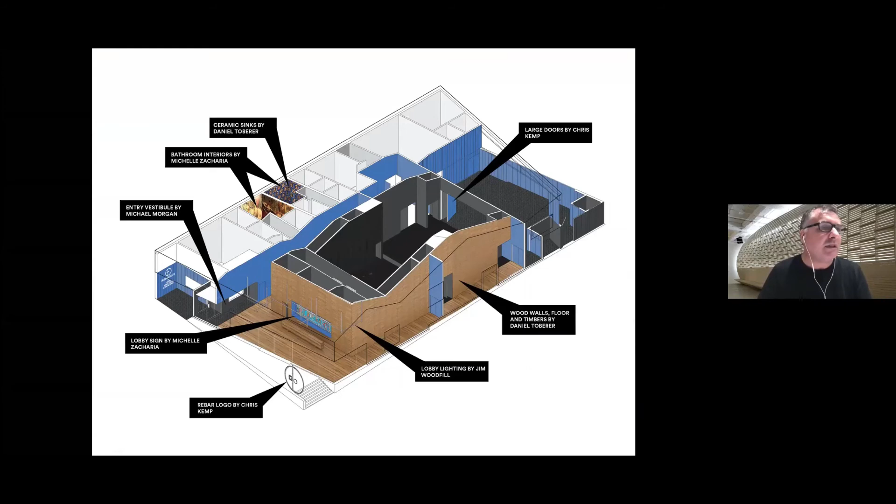So we hired 4 artists specifically to work on our design team, ultimately giving them each an area to work with and collaborate with us and the contractor. But many other artists have been commissioned after the end of construction to do various different things within the space. So the artwork, this is an example, Michael Morgan's brickwork.

It's a good example of David Pye's workmanship of risk, where this local clay is fired and takes on these really unique forms. So he worked within this vestibule area. Other artists worked around the building in various different ways, working with us, but we were not dictating ultimately what they would do, but trying to accommodate their own work patterns and practices within the nature of the building itself.

Daniel Toberer salvaged all the heavy timbers used in the building. These were all salvaged from trees that had been felled by windstorms or disease or other things around the city of Omaha, and then milled at his shop and then brought in whatever form they're in inside the building itself.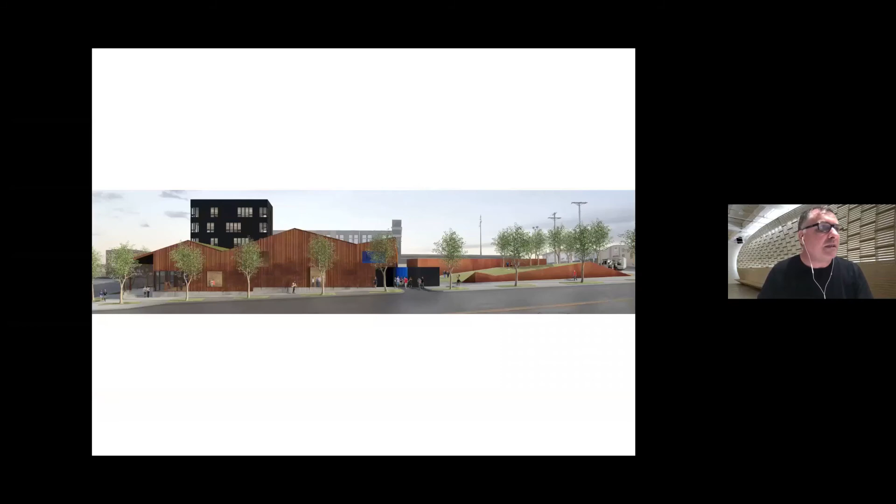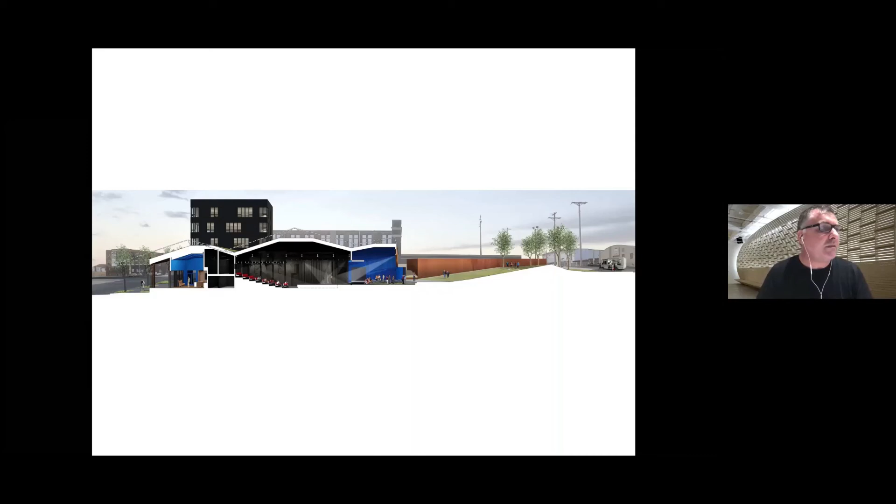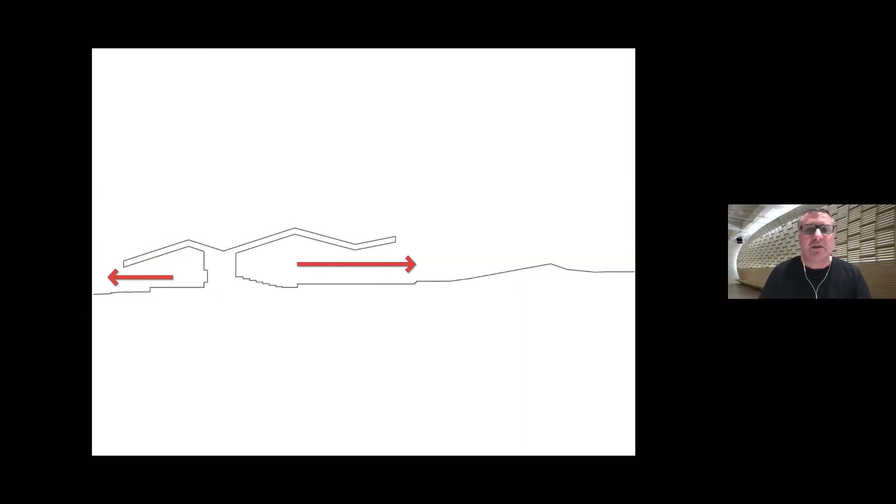So the form of the building is dictated in some ways by the needs of the program, the taller spaces being in the theater itself. There's no fly space in this theater, but a grid at 14 feet above the stage. And then a desire to open up all aspects of the building. So the front of the building opens up to the street, the back opens up into this green space, allowing the building to start to inhabit its environment in very unique ways.

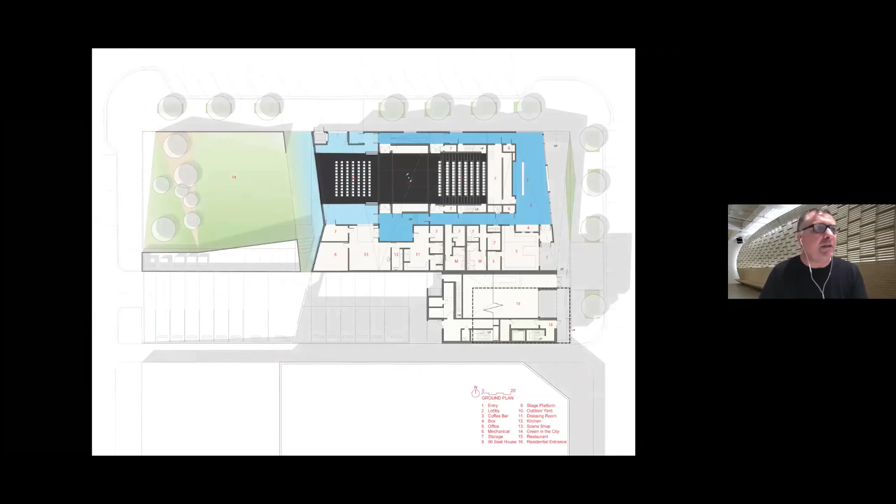So we start with a proscenium stage, sort of basics, fixed seating and stage, but then allow that to open up into what we call the porch yard, allowing the company to stage a variety of different performances in different configurations. And they've done almost everything that we've depicted here. So here's the house. The seating is salvaged from the previous Blue Barn Theater, which was a warehouse building that they'd inhabited, and that was in turn salvaged from another theater in town.

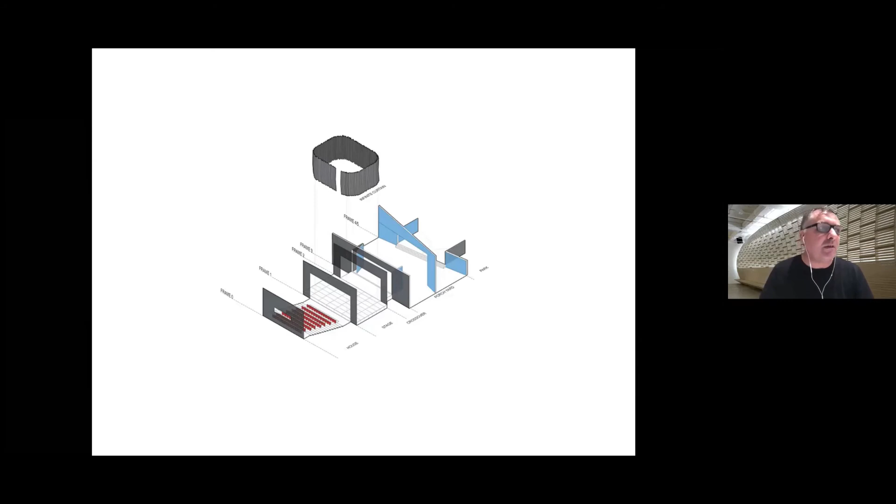So our conception of this space really begins with the idea of the proscenium as a separation between the house and the stage. The black box gets rid of that and creates a single unique space. We then said, well, instead of getting rid of the frame, let's create multiple frames, spread those out through the space, and allow that sense of the proscenium to occupy different realms, so that the performance could be on the stage, in the audience, in the porch yard, or outside in the green space.

Technical aspects of the theater are all met, with the grid able to hold quite a bit of weight and allow set materials to be installed, and so on. But then the big moment here is the door that opens up to the landscape. This is an example where commissioning an artist really worked to the benefit of the theater.

The contractor was trying to tell us it would cost $120,000 to build these doors through their normal procurement process. This was an artist we added later in the process. We went and found an artist who was really a brilliant sort of mechanical engineer, and asked him, and he said, I'll do it for $12,000.

But we ended up giving him 25 in order to make sure he had enough budget to cover his costs. But stripping away liabilities and profit margins, contractor overhead, the general contractor just had to produce an opening with structure capable of holding these doors. But these are 12 feet tall. Each panel is 7 feet wide, and the hinges are all custom milled in a shop.

And it allows a performance to then open up to the green space. So the theater is no longer a neutral space, but it's one where the noises of the city, trucks driving by to the local post office, or cars, or dogs barking, trains going by, are all going to become part of the experience of the performance. When the doors are shut, it can start to act in a more conventional fashion.